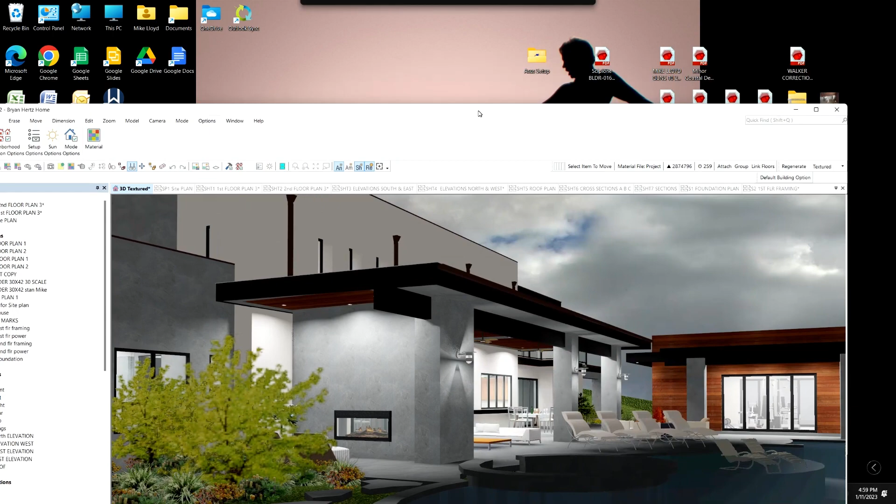Hey Bryan, how do we get rid of that beam? That's the question. I've got to show you some of the problems with trying to get rid of the beam.

This is what I proposed. I think that's nice and sleek and clean, but I understand what your objection is. The beam hanging down below there does look more traditional, doesn't look as modern. I think it looks great, but okay, I've already made my point.

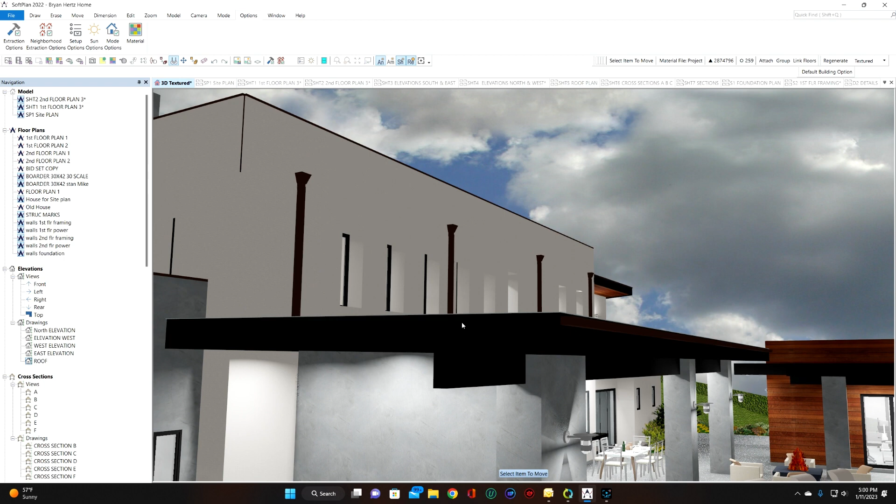To get rid of it, we either encase it like I showed you, and then to get rid of the gutter, we put a parapet around it and back drain it over the columns, and then you put an interior pipe in there and a couple of scuppers. We talked about that. How do we get rid of this beam?

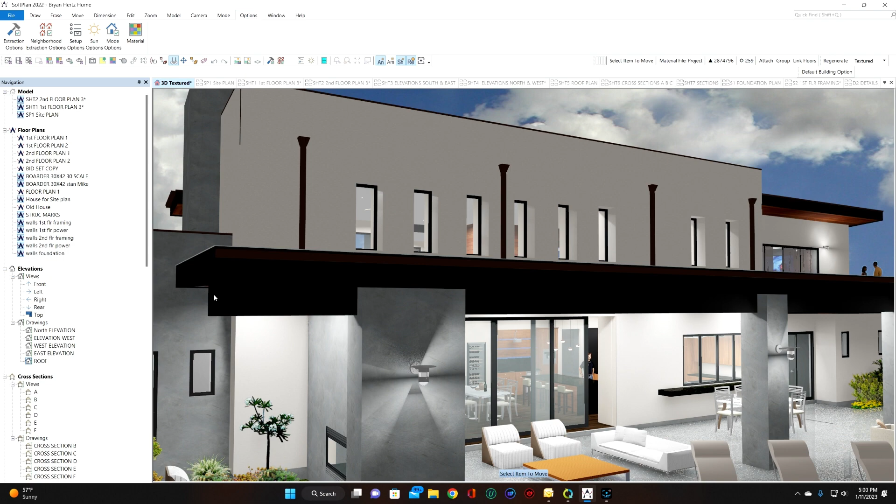There isn't a good way. You have to have a beam there structurally to carry all this stuff. This span is 24 feet. That's huge. And when you cantilever it over, it's like 30, actually 35 feet. I don't even know if we can get one that big. If we can, it's a premium.

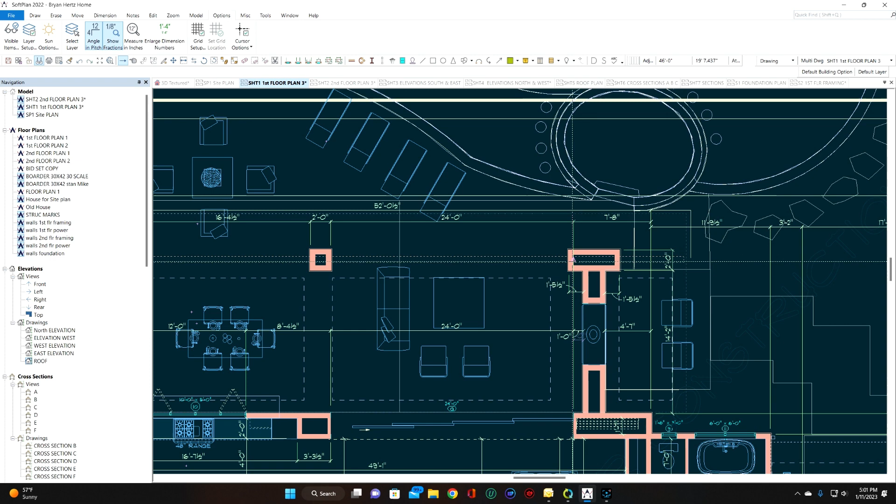So what I had proposed with this, since we wanted to cover it up and stucco it, I was going to just make one go the 24 feet from here to here, and then sandwich a beam alongside this beam to make it cantilever. And then that all covers up inside that stucco box that we're putting in there.

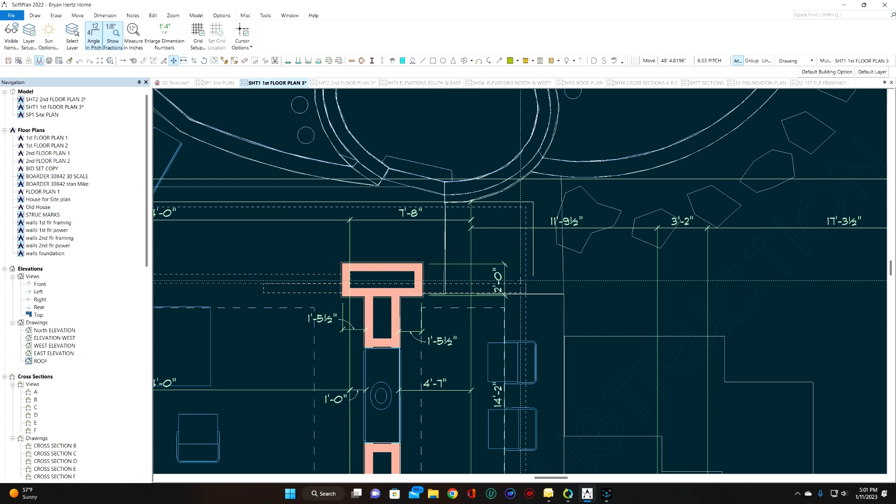So these bolt together and that gives it this. Now you're just buying a 24-foot beam and then a 16-footer, and I can make that cantilever work there, and then you box it. Well, you get the idea.

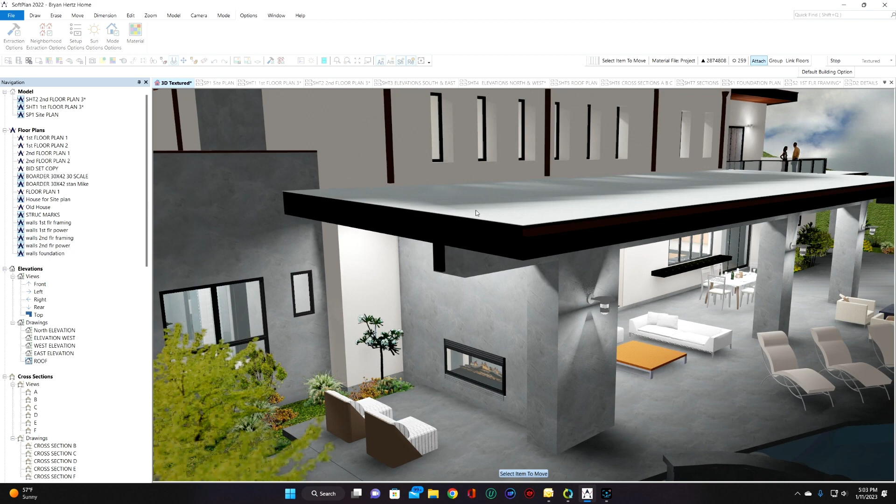Then if we put a parapet around it to get rid of the gutter, it turns into what I showed you last time. There's a way to get rid of this, but it makes this facade even bigger. So let's put this back, this parapet. Right now that's 3 feet, and you can see 3 feet, you come across here.

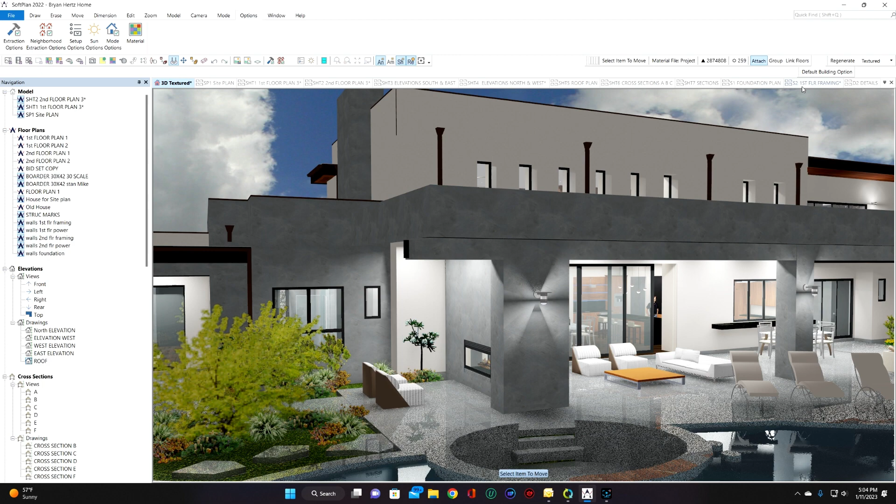It works if we do a roof like this and leave the beam hanging down below. But here, let's go to this. This is, I think, easier to grasp. This is what I proposed the first time. So this is not using a truss.

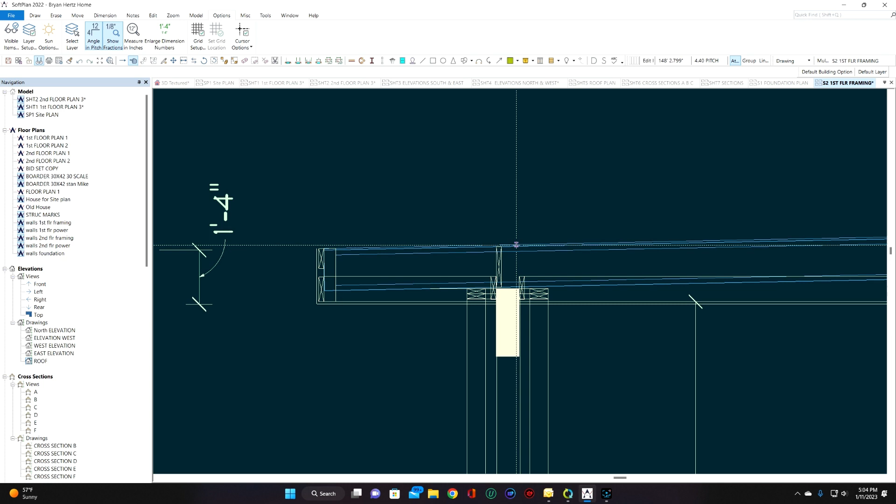This is using the TJIs that we talked about. It's a floor joist, but you can use it for this. We use them all the time for this. But to get this to span and carry what it's got to carry, stucco load and everything underneath it, and a roof, it's going to be about a 12-inch deep TJI.

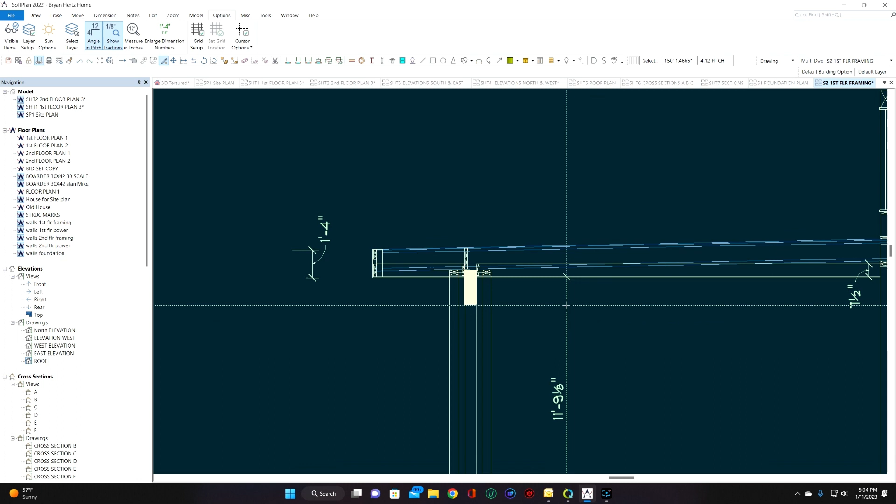So the top of that beam's 12 feet, but we're trying to get a 16-inch fascia on the outside and then the rain gutter that goes on there. And so this drops down, and the ceiling on this, to get it flat, this is what I was talking about. If I don't do this, then your ceiling is sloped, it's got the slope of the roof on it.

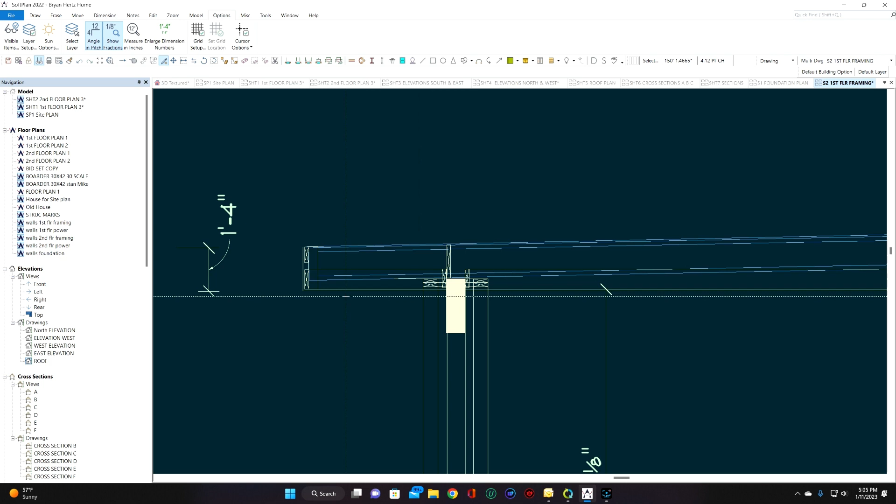So you come in, you do this, and it hides part of the depth of that beam. That beam's 20 inches deep, so that's a tall beam. This sits on top of it. This is doing all the work of holding up the fascia and this soffit, and then this also attaches to it, and then it stuccos underneath, or gets that stucco into wood that I showed you. There's a little more work of putting a parapet on there that puts a little bit more weight on here, but that beam is sized to handle all that.

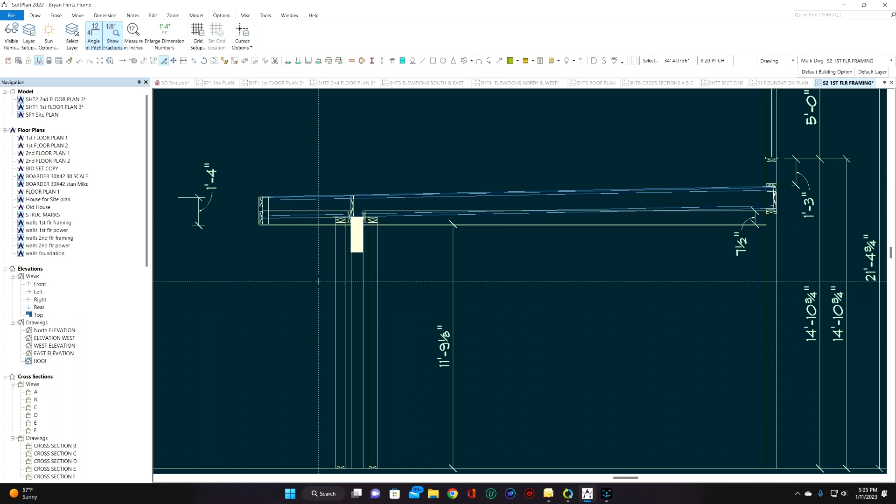So with this scenario, you've got an 11-foot-9-ish ceiling in here. You've got a 10-foot door here, so that's fine. The bottom of this beam is about 10-foot-4. And what we're doing with this is we're encasing this, hiding all this in a big stucco box like that. That's the box that's holding this main thing. You're only going to see that much of it.

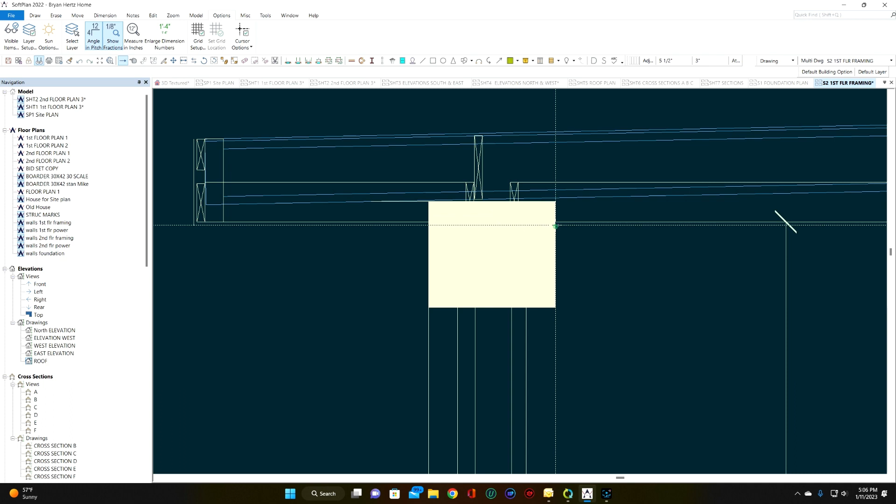That's the idea. Let me take this back here. And now, when this slopes up, it comes up underneath this window. This is a section cutting that wall in half. Here's the great room. Ceiling's 21 foot 4 inches to the top of the ceiling there, and then you've got your parapet on top of there.

This is actually a double wall. You've got another wall like something like this. It's about like that, doubles up. But this is the idea here.

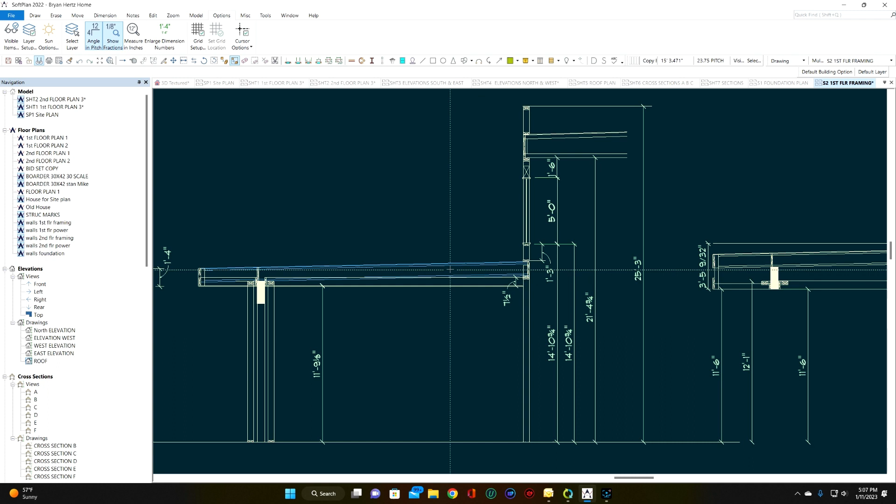What we could do to get rid of the beam—I can't take this beam up into this and cut this beam off here and keep any of this. It won't work here. So what you do is something like this.

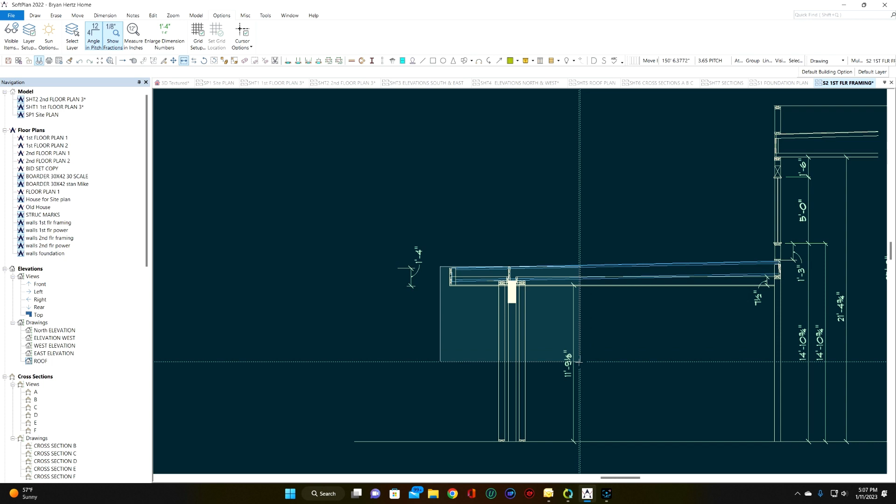Keep an eye on this right here. And we've got an 11'9" ceiling. Let's take the whole thing, stick it over here, and then we'll take this. And what I'm doing here is pushing that beam up, get it to stop fighting me.

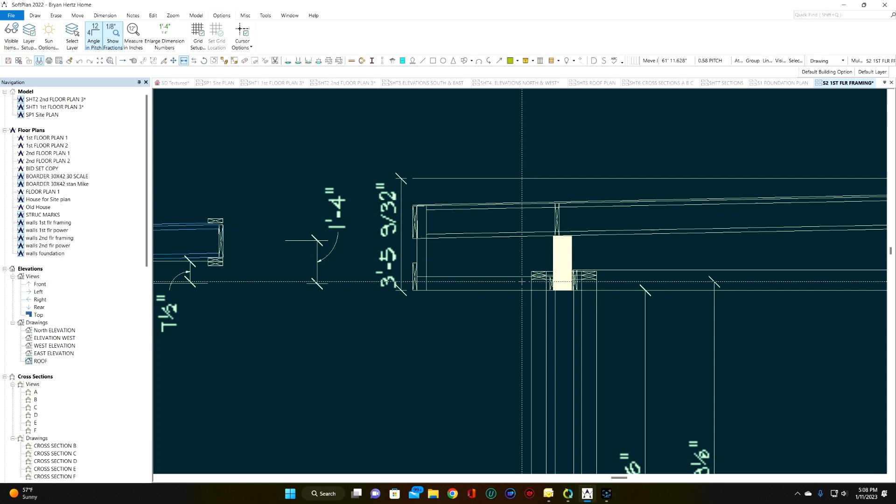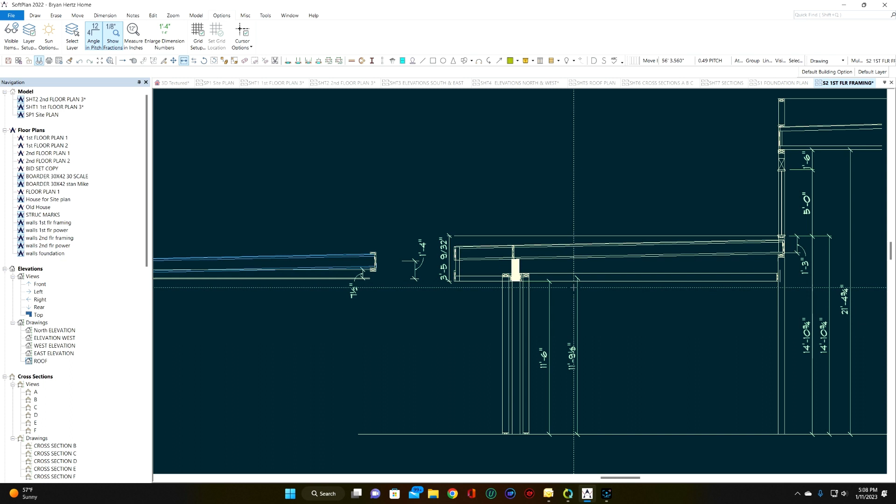I'm pushing that beam up, and then this rafter goes up on top of it, still doing the work. But now we're encasing the beam, so the bottom of the ceiling is here. Well, that brings that ceiling down to 11.6. So your ceiling, the whole ceiling going across here, is 11.6. The beam disappears, and you get this look.

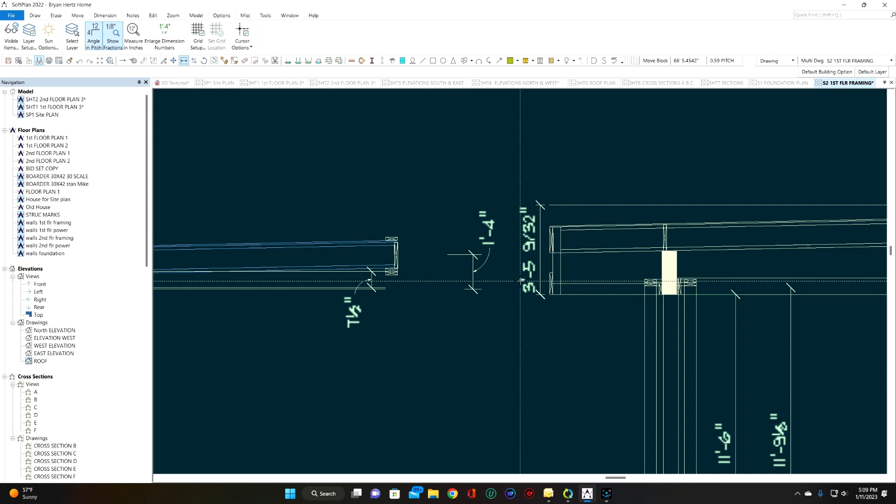Let's go back here. That's clean, but we're not done. This still requires, the way it is right now, a rain gutter on the end. Otherwise you're going to be spilling water over this edge and down the stucco, and it's going to make a mess. So you need something to carry the rainwater off that roof and away from the stucco.

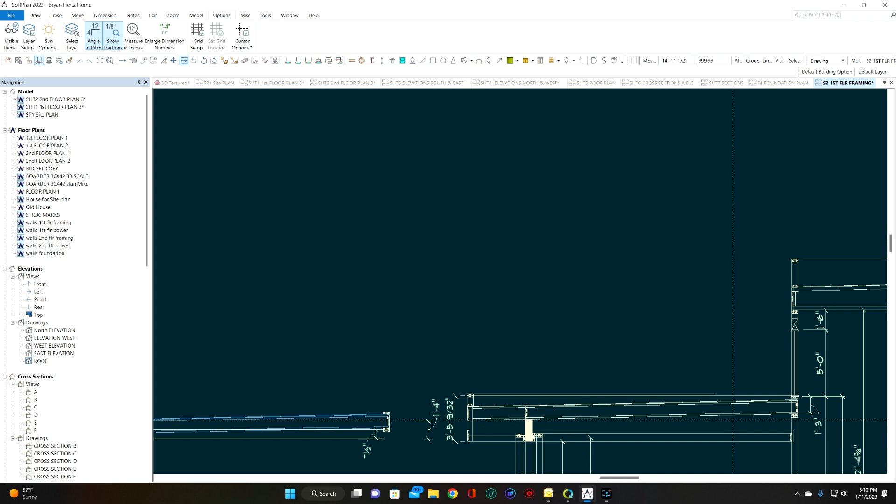So if we built a parapet on it, and that parapet comes back into here, this becomes a problem right in here. That's the bottom of that window. Before, with the other scenario, I had a 1'3" clearance between the bottom of the window and the roof. That's easy to waterproof. You take about 6 inches, and you've got an L flashing and a Z bar and another flashing, and then your stucco, and you can easily waterproof that.

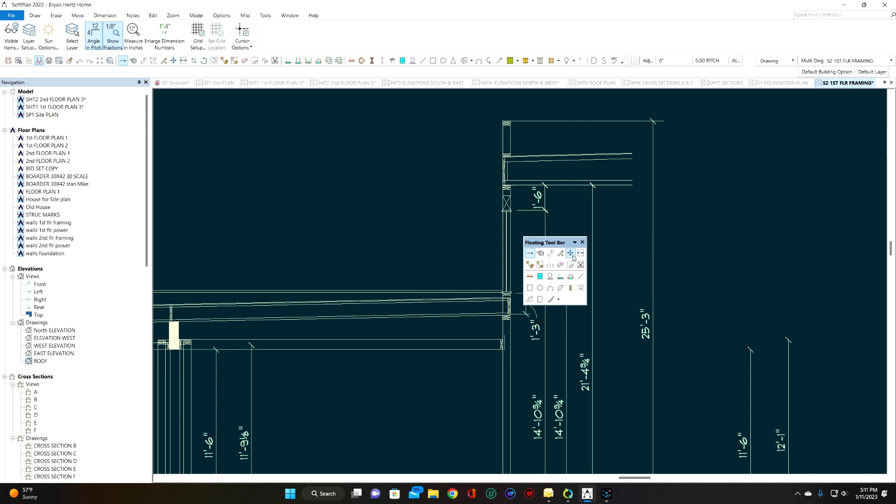Not a problem. But this is a problem. That's way too close to the roof. You're not going to be able to waterproof that adequately. So something's got to give. We either make the window smaller—like even if it gave me, this is actually coming up to here—I got 2 inches, say 3 inches there.

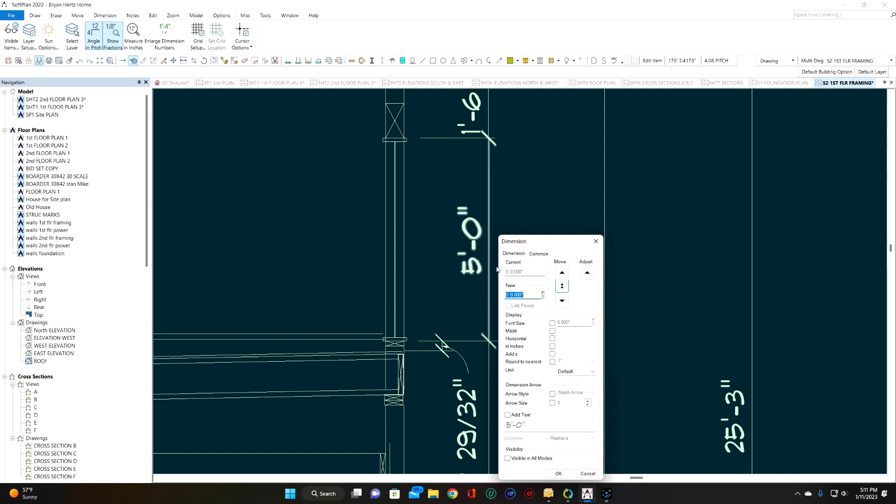I'd be much more comfortable if the bottom of this window was up 6 more inches. That gives me 8 inches. So the bottom of the window would be here. I've changed it—to do that I'm changing the windows to 4'6" windows. But that's still tight. It's still tight to make that work.

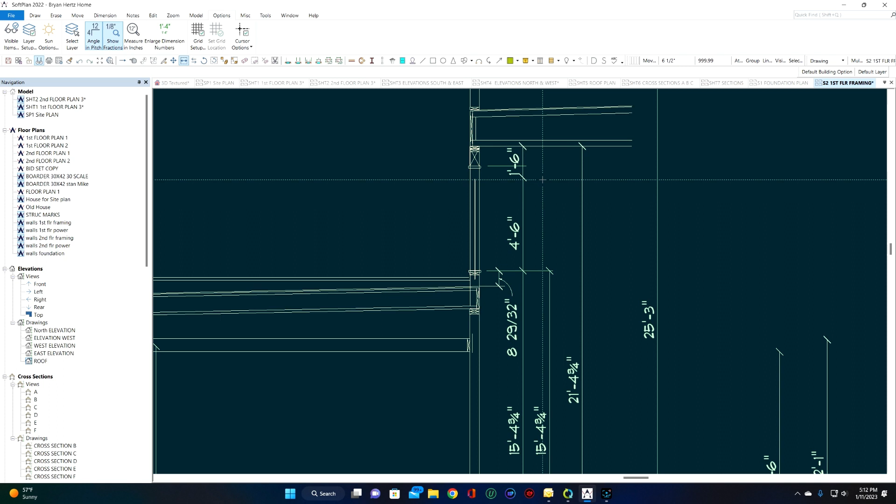I would be much more comfortable if it were up another 6. And the way to do that is to take this header, shove it all the way up, take this now, 4'6" window up top, gives me plenty of room now to waterproof that and make this work. And now this parapet though is 3'6".

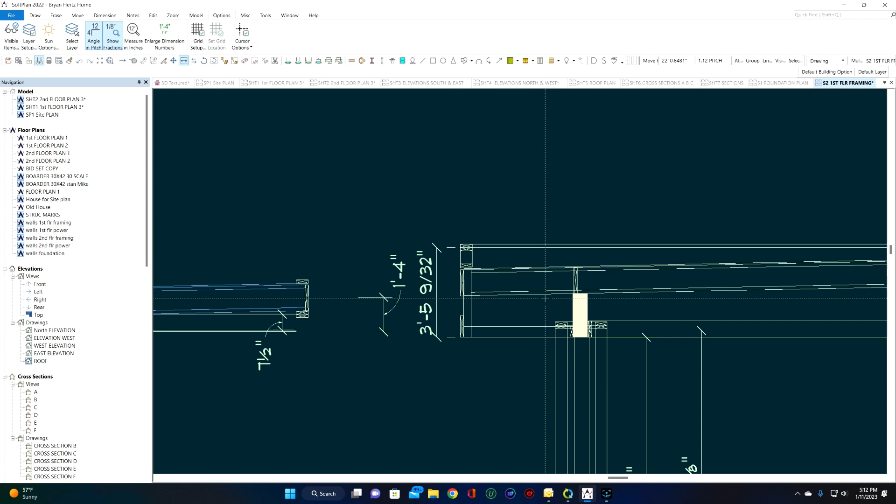And what that looks like out here, let's just make it do it. 3'6". 3'6" inches. So it makes it heavier. This is what I was looking at when I was making the comments that I didn't like it. It's too heavy, it's too much.

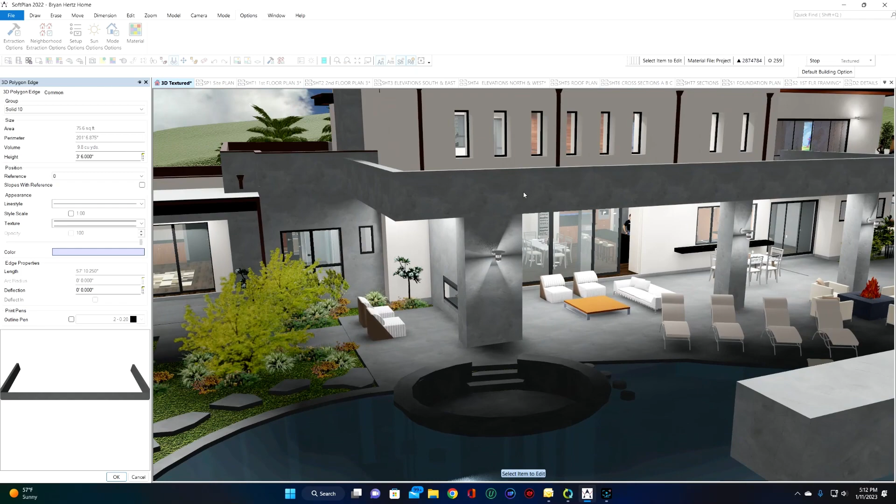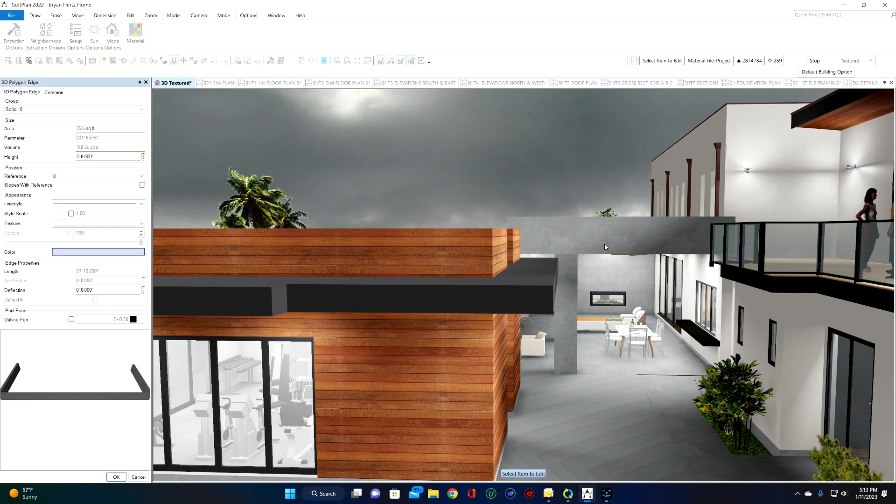So we go through all those gyrations to get rid of the beam, and now you get this massive thing up here. I don't like it. That 6 inches is just, in my opinion, too heavy. The whole thing sitting there—I don't like it.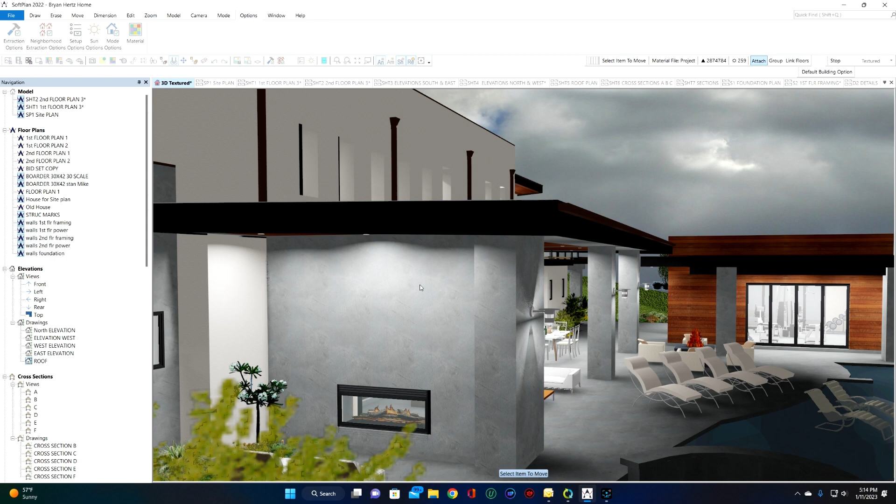I think that the original is the best. You're going to have these gutters that come out and swing down and then go down the face of these, probably in each one of the columns, but I don't see any other way around it. And I think that this is so much cleaner, but it's going to have that beam hanging down. And the bottom of this beam is 10'4".

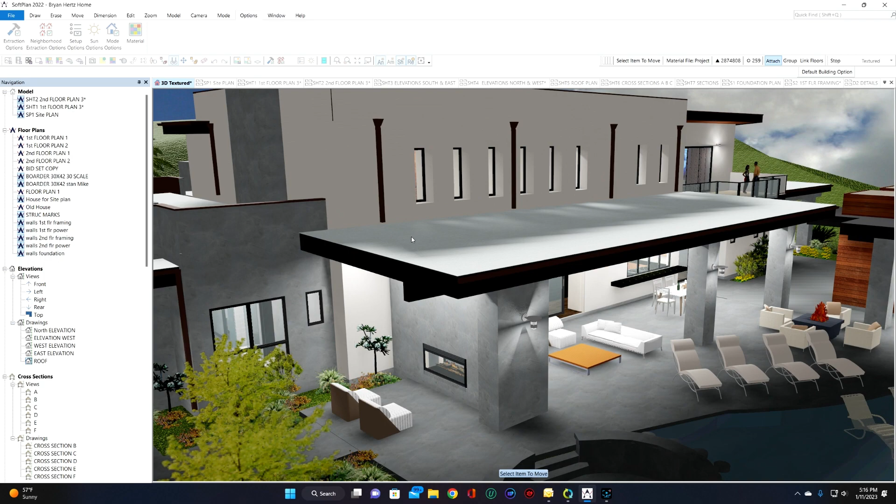I think that's the best. We can—that's a 20-inch deep beam. That's why it's so difficult to deal with. You've got to run the rafters over the top of it and then encase the thing, and there's just no good way. And if you went steel, it would still be almost as deep. Steel bends—steel's not as stiff as wood, actually.

So, I think that this is the best answer. But let me know what you think. We can take this here—I can take this back and shove it in here and give you one more look at it.

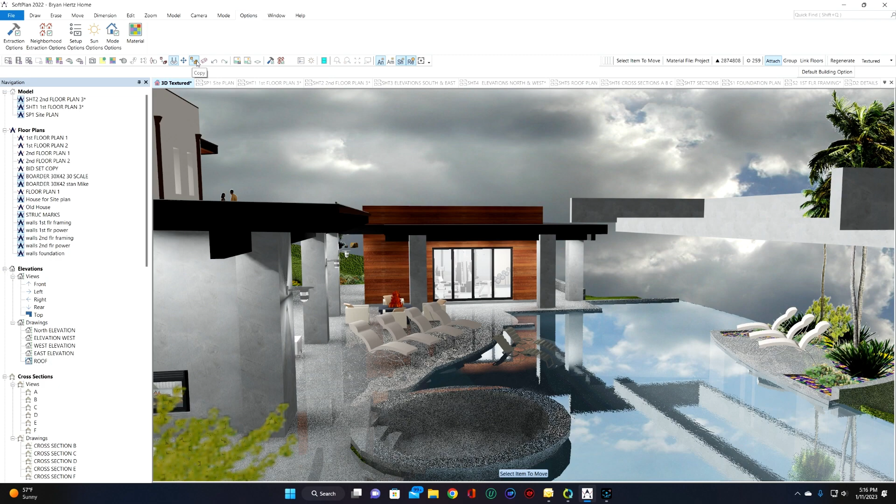If you don't mind that, I can make the—I have to raise these windows up. These aren't showing them raised—and make them smaller, because that's really the... this doesn't show it, but the top of the roof is really right here. After you push that up to encase the beam, I'm just deleting the beam so you don't see it. Top of the roof is way up in here.

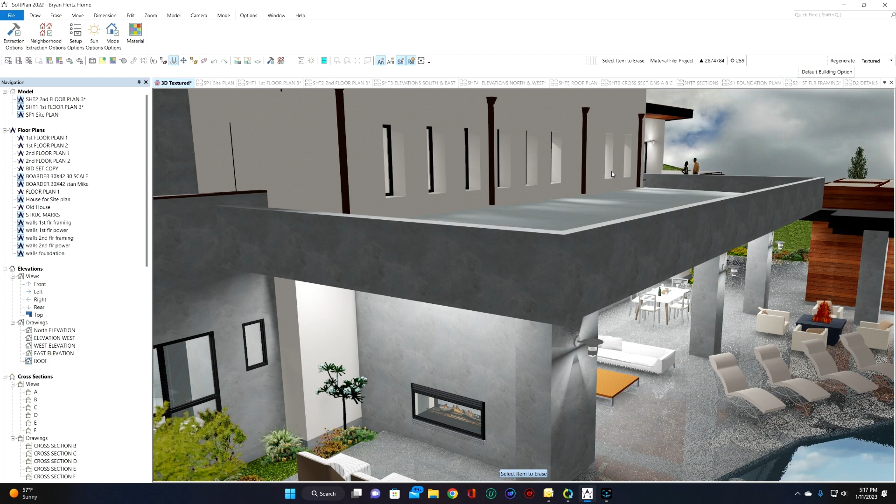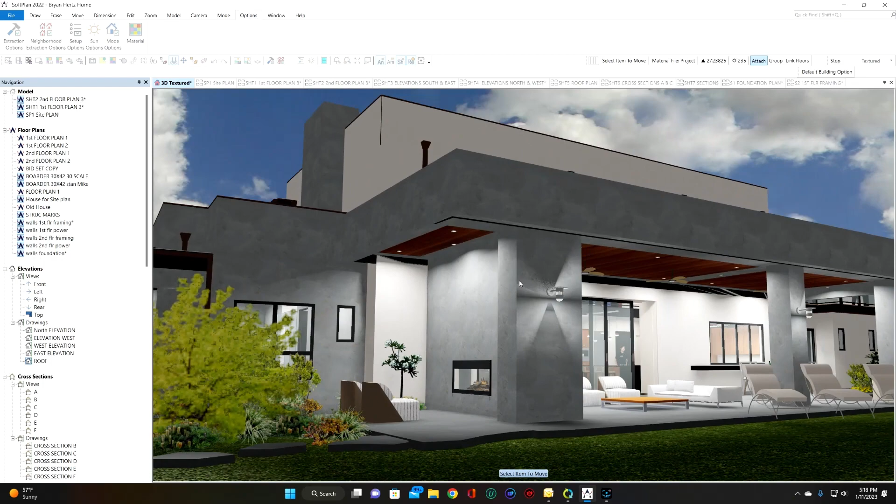I just think it's too big. It looks massive. Let me know what you think. Yeah, that's it.

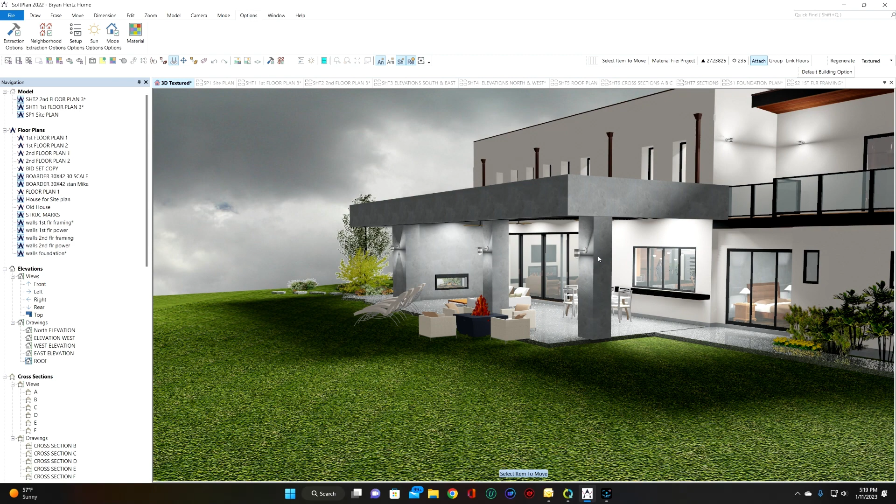Could drop the ceiling more, but all that does is move this down, and I think it looks worse. Okay, well, tell me what you think.